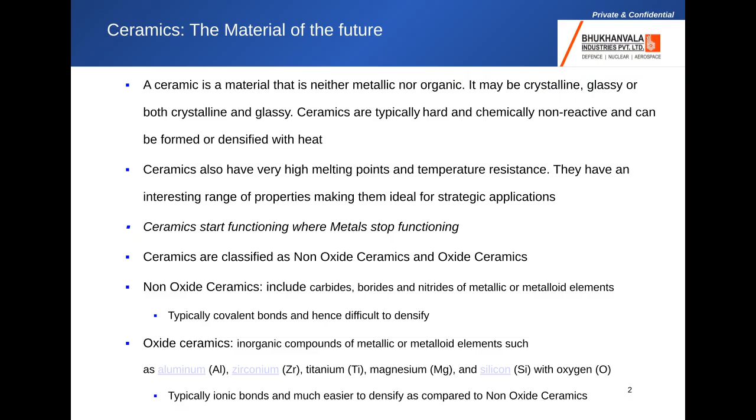I'm going to skip this. So non-oxide ceramics, that's been our main focus. We're now getting into oxides, but non-oxides are really what we've been involved with since our inception. These are carbides, borides, nitrides of boron, silicon, titanium, zirconium. They have very unique properties, very high hardness, excellent wear resistance, as well as oxidation resistance.

I'll be spending more time on boron carbide. That's our flagship product, which has very high hardness, low density, great nuclear properties in terms of neutron absorption. So it has applications both in defense and nuclear. There's boron nitride, which we are now working with ISRO and through a technology transfer are now actually making product that will be used in the Indian space program.

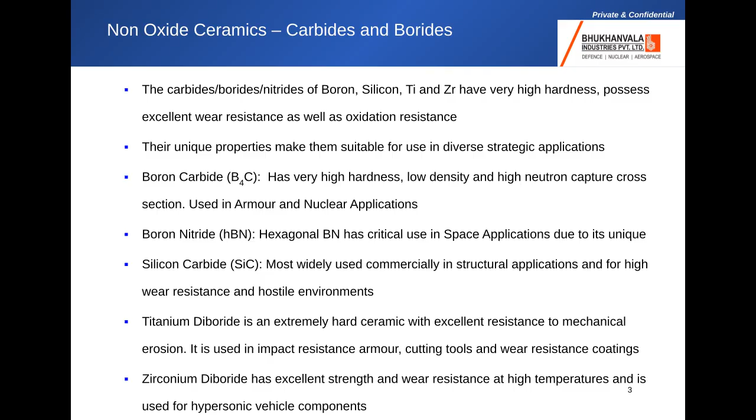Silicon carbide, again, very widely used commercially as well as in defense environments. Titanium diboride, again, excellent material for both wear resistance as well as nuclear application. This is something that we are now beginning to make under a technology license from BARC. And similarly, zirconium diboride is a material of interest for hypersonic vehicles, re-entry vehicles.

So just a small table of materials. I've tried to map out some of these ceramic materials and where we are seeing their applications. Of course, this is not exhaustive, there'll be probably more applications. So for boron carbide, on the defense side, you have boron carbide, silicon carbide, alumina, which are being used as armor material, both for body armor as well as for vehicle or aircraft armor. You have zirconium diboride, which is being used for ultra high temperature applications. So when you're looking at re-entry vehicles or hypersonic vehicles, there's work happening on that.

On the nuclear side, boron carbide is an excellent material for neutron shielding. And one of the things I'd like to point out is when we are talking of AI, ML, if you see the amount of energy that is required, the investment that you're seeing globally now on nuclear reactors, both fusion as well as small modular reactors, you cannot make a reactor without using boron carbide. So for us, the last few years of growth have come from the nuclear renaissance that we're seeing in the world.

And so everything that you talk about, whether it's the energy sector, it requires ceramics. Whether it's the defense sector, it requires ceramics. So this is more a pitch to all the people studying material science that you can remain in the core. You don't have to move towards AI ML. AI ML will require all disciplines of engineering to contribute.

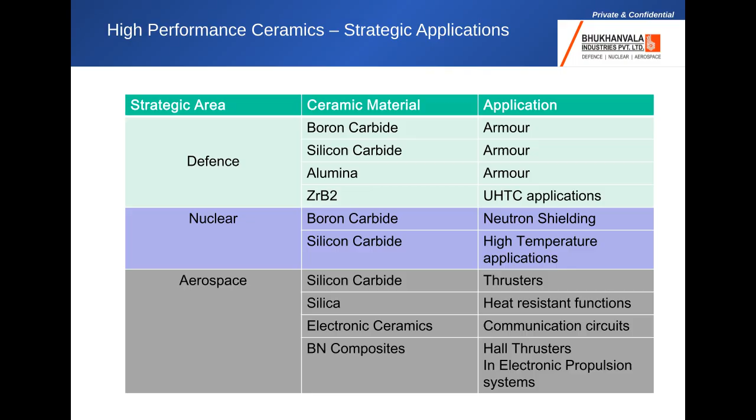And boron nitride composite. Boron nitride is a unique material where it's an electrical insulator but a thermal conductor, so it's used inside Hall effect electric propulsion systems. Your liners for the Hall effect thrusters are made out of this. This is now a flight qualified component that we have made with ISRO's help, and from this year it will replace American liners in the Indian space program. So this will be made in India for Indian satellite launches.

I think this has stopped. Can you... you can just go to the next slide, please. Just one slide back.

Like I mentioned, we are focused only on strategic applications. We do defense, nuclear, aerospace, and we are beginning to do some work on the semiconductor side as well. We're the only manufacturer of a complete range of boron carbide, from synthesis of powder itself, which we have a technology license from Bhabha Atomic Research Centre, to finished hot press components used for both nuclear and defense.

We've done a lot of strategic projects in India. On the fast breeder reactor being built at Kalpakkam, that's really the genesis of how the company started, to support that requirement. Under the technology denial regime, BARC had no alternative but to work and develop that indigenously. That's really what developed the capability at our end.

And we are also supplying into, I'll talk about this later, some body armor designs that have been made by DRDO as well as by BARC for the Indian security forces, based on our ceramics.

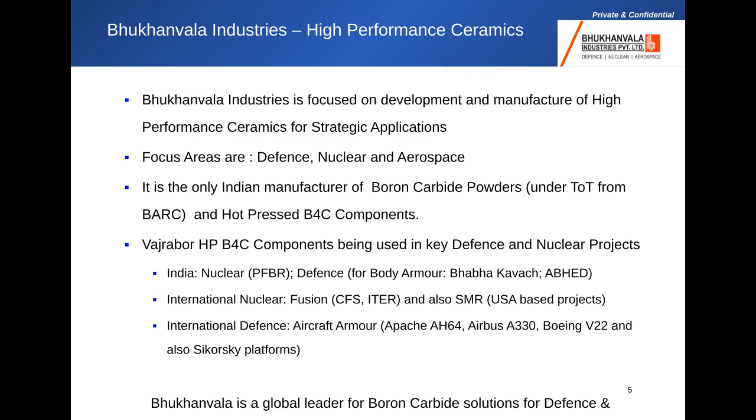CFS is a spin out of MIT. It's actually the world's largest funded stage Series B round, they raised $2 billion for Series B to build a prototype fusion reactor called the SPARC. We are supplying all the neutron shielding components into that. We've already supplied over $15 million to them, and there's another $10 million in the pipeline.

We work closely with ITER. This is where Prime Minister Modi had recently gone to France. We're working with different ITER units, and they will require huge amounts of shielding. So as a material, this is a great material to be in and to scale up.

We are also working with some of the small modular reactors. A number of speakers have talked about the requirements, and India has also announced a policy. Small modular reactors will require a huge amount of ceramics, both for shielding as well as for thermal management. On international defense, our focus has primarily been on aircraft armor.

Boron carbide is a very light material, and for aircraft platforms, weight is a premium. So anything that when they armor - some of our customers are making seats for helicopters, and the pilot and co-pilot seat are ballistically armored, so that when there is small arm fire, it protects the pilot and co-pilot. The ceramics are used in that context.

We're already on a number of platforms. We're on the Apache AH-64, we're on the Boeing V-22 Osprey, we'll be getting onto the CH-53K soon as well, and we're on a couple of AgustaWestland platforms as well.

So our idea is, we are a global leader in boron carbide solutions. We want to look at strategic expansion of our material portfolio, and my next slide will talk about that. We are a good model of taking a technology that came out of a government lab, really productionized it, scaled it up globally, and we want to replicate that with other technologies, other materials that we are licensing.

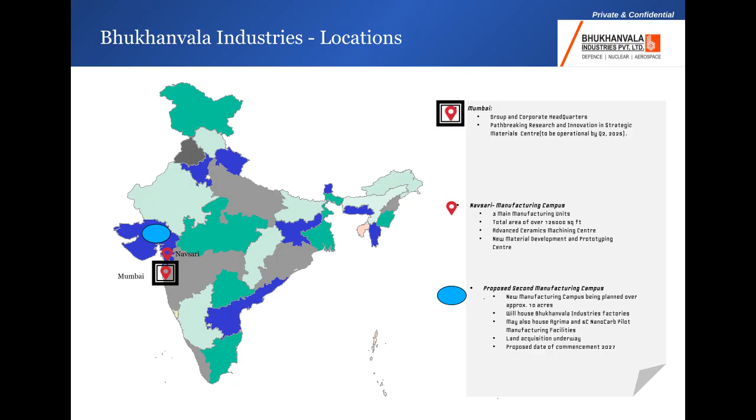Our engagement with IIT Bombay - we are calling our lab at Research Park 'Prism', for path-breaking research and innovation in strategic materials. It'll be focused on electronic ceramics for space and defense, and we'll also have a lab focused on advanced carbon technologies, where we're doing work on carbon nanotube sheets as well as carbon nanotube fibers. These are again technology licenses from BARC.

We recently signed an MTech fellowship program with IIT Bombay. A second year fellowship will be funded by us over the next many years, and students will be able to choose a project related to advanced materials with strategic applications. The first student has already been shortlisted by the institute, and we'll be doing work on substrates, alumina-based substrates for the space program.

Just a very quick introduction to boron carbide - strategic applications in defense and nuclear. Boron carbide is a unique material because it stops bullets and it stops neutrons as well, so it's one of those few materials used in both applications without any change in form. Its lightweight and high hardness make it ideal for body armor or any other armor applications with weight constraints, and it's expensive - a very, very expensive material. We have this constant engagement, or arguments, with the Indian users. The gentleman in uniform will appreciate that we always want the lightest, but we don't want to pay for it. I always tell them that we are the lightest, like to like, and we are the cheapest in the world. But there is a certain intrinsic cost to the product which cannot be brought down.

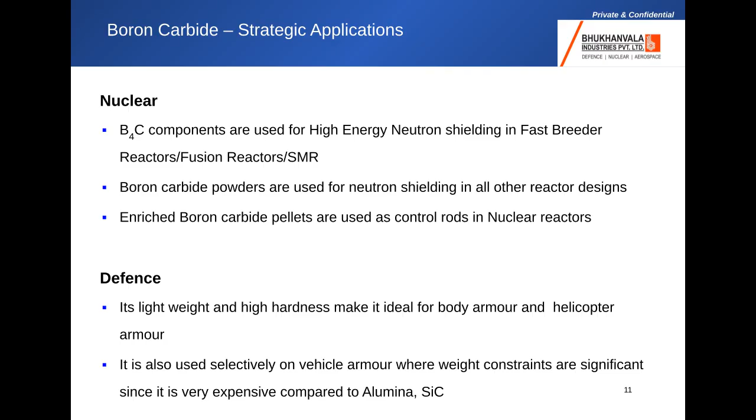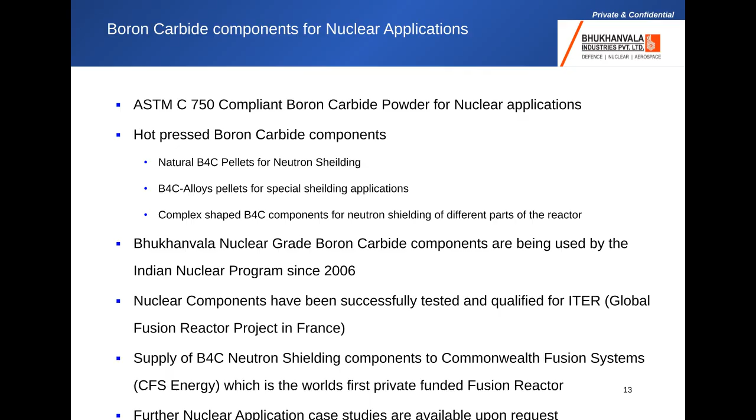Like I mentioned, we do the entire range of powders. For nuclear applications as well, we're supplying globally, and I think India needs to catch up on both the fusion and the SMR side. We are falling behind - the amount of startups we're seeing in France, in Europe, in the US for nuclear is fantastic, and I think we're being left behind on that. So I think you can't really have strategic autonomy unless your energy sources are secure.

I'm going to quickly run through some of the platforms like I talked about. We're on the Apache, on the Osprey. We'll be on the replacement for the Osprey, which is the FLRAA, the future vertical lift platform that the US is making.

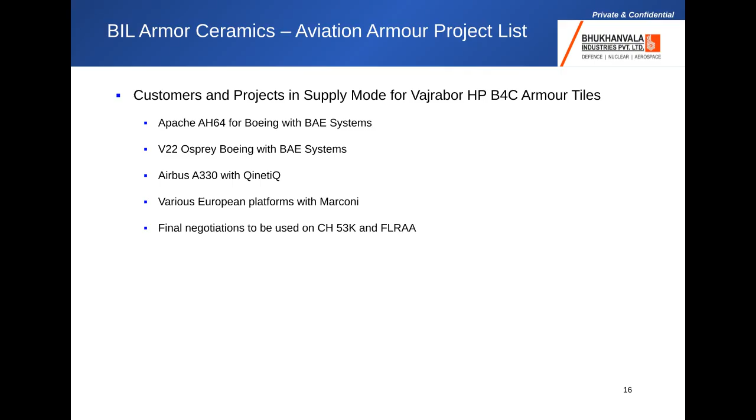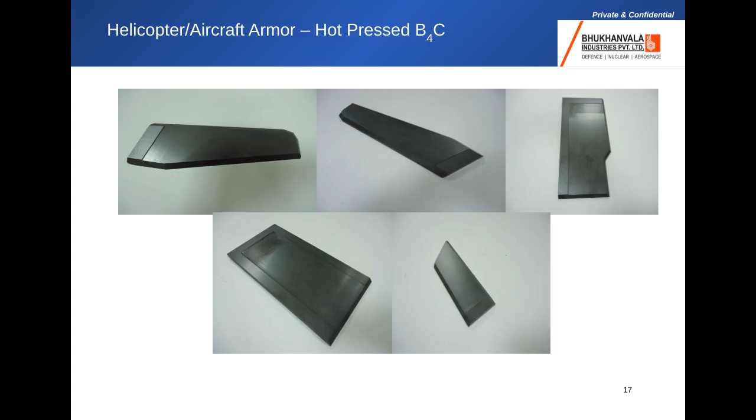These are some of the ceramic parts that we make, all built to print with complex features. Because they go onto the seats, they have to match with the metal frame of the seats. So this is something that we cut to size here and ship to the US, where it gets integrated into the final product. We are on the Apache - we've already supplied into over about 180 helicopters, and we have a new contract for another 336 sets with the US. We are on the Osprey, which is now kind of winding down, and we are on a future lift platform as well.

We will soon hopefully be on the ALH and the LCH as well. That's something we're working on with the Indian ecosystem to get our ceramics on the Indian helicopter platforms.

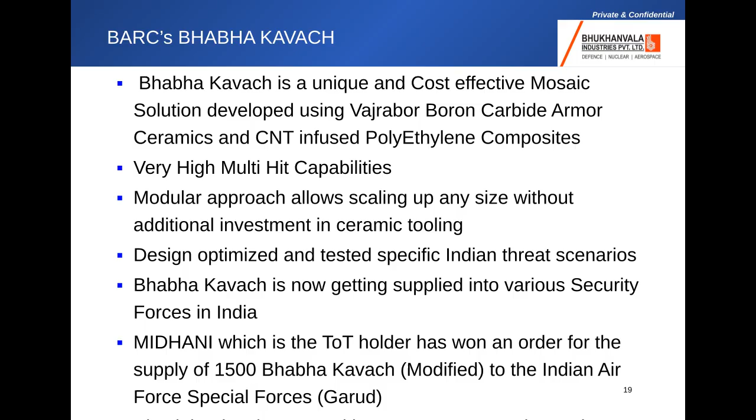There are two initiatives in India to make lightweight body armor. One was through BARC, called Bhabha Kavach, which used our ceramic and carbon nanotubes in the polymer to develop a very good solution. MIDHANI, a DPSU, is a TOT holder and has been supplying some amount into the armed forces, though it hasn't really scaled up due to price concerns. I believe there is now an engagement with the Air Force and DRDO to get that done, and it's a great solution, very well designed.

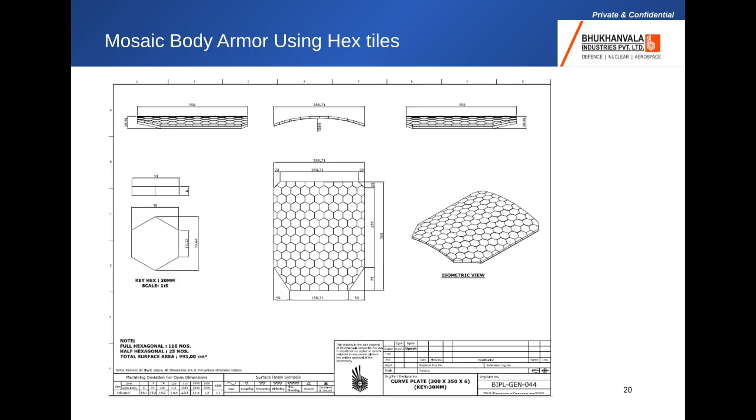Similarly, there is a recent technology announced by DRDO and IIT Delhi called ABHEDH. An MOU was signed recently by the Raksha Mantri for 3 technology holders to take it up. This is again based on our boron carbide ceramic.

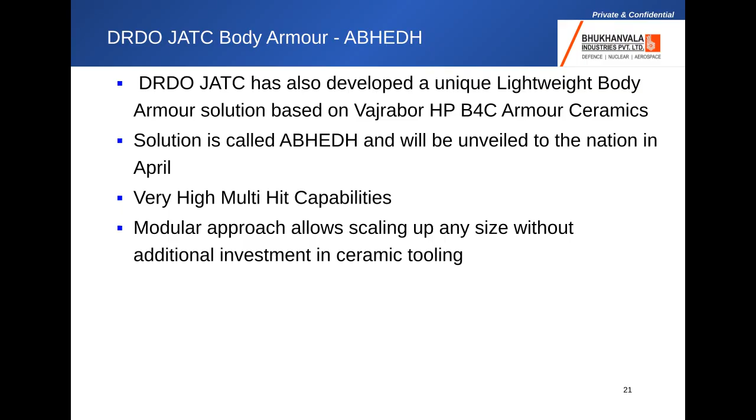I'll talk a bit about, at a policy level, how to take these solutions into the armed forces. This is a very good solution, designed for API rounds, BI6, and very extensively tested by IIT and DRDO. Hopefully this will translate into usage by the forces.

With this constant cost pressure, we are now introducing direct sintered silicon carbide, which should be substantially cheaper. It'll be maybe slightly heavier than boron carbide, but substantially cheaper, and if you take the mobility and weight requirements of special forces out of the equation, this should actually work for the majority of the forces.

The US Army also uses this material as the material of choice for its bulk infantry, keeping the very lightweight solutions only for the Green Berets or the Marines. I think that's the right way for the Indian Army to look at it too - to have a differentiated QR for weight, so you're not forcing the special forces to use the lowest common denominator on price.

As I mentioned with ISRO, the electric propulsion systems will soon use liners, and we are very excited about the whole private space industry, so that once it goes on ISRO flights, we can cater to all the startups here as well.

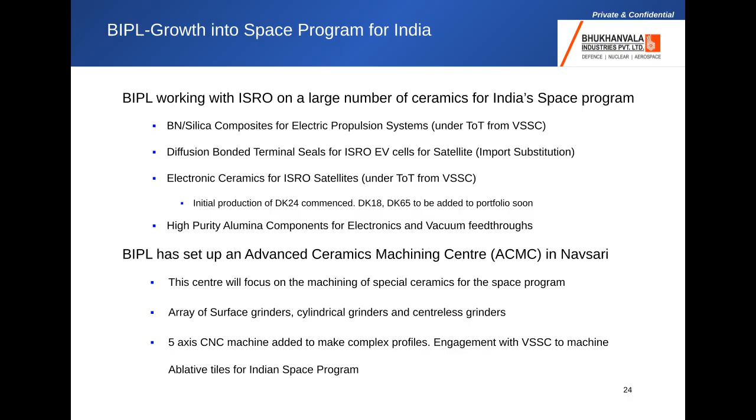So these are some of the parts, like I said, aircraft armor. These are the thrusters that I talked about. Some high purity alumina cones that we're making again for the nuclear program. Where you have a high plasma environment, you have the ceramic facing the plasma side, and then you have the metal on the other side. We're doing some sputtering targets.

Again, this is something that we have now stepped into as our segue into the semiconductor industry. We're beginning to export sputtering targets to the US and Europe. Our idea is to develop more sputtering targets with IIT Bombay's help, looking at different materials. IIT Bombay itself imports a lot of sputtering targets, so our plan is to first start working with your needs, develop high purity sputtering targets in India, and then benchmark its performance with imports, and then start exporting.

Electronic ceramics is what I talked about. So BMT is one particular material composition. We now have 5 different compositions from ISRO, all operating at different frequency ranges, including what will be used for the NAVIC chip as well. So we've got that technology transferred as well.

And this was the terminal seal I talked about. So the white thing that you see is alumina, this is aluminum, and you're able to join those two without any braze layer. It's a unique technology developed by ISRO. We are hoping that we can use this technology to join two dissimilar metals, or different combinations of ceramics and metals. It has a lot of applications. Right now the system is a very small one, so we can do very small components, but the technology itself has great potential.

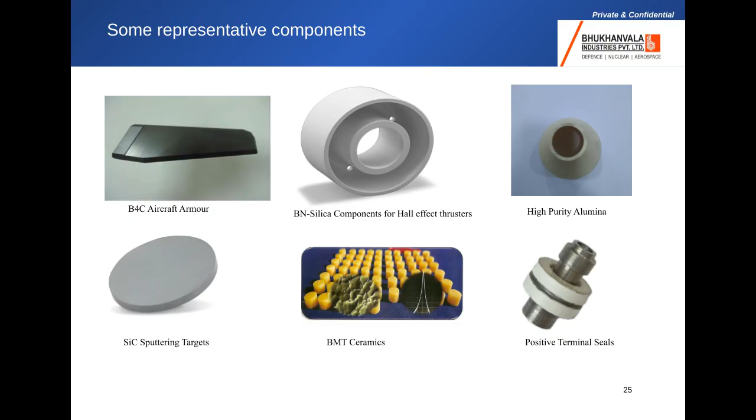So I would just take a few minutes to talk about what I think is important policy-wise to look at for strategic materials. I think what we really need as a country is a national strategic materials policy. What are the materials that are critical for us as a country? When you look at defense, nuclear, aerospace, as you know China has a monopoly on all rare earth metals, and this whole Ukraine war is eventually going to end up with the US and Russia getting access to that — that probably could be the underlying reason for it, right? However, as a country, we don't seem to have any long-term vision on what's going to be needed to secure these materials for us.

Today, when we make boron carbide powder, we are still dependent on boric acid, which is imported, because there has not been any real exploration done on whether boric acid deposits exist in India. So right now, most of the material is coming from Turkey. They have one of the largest mines. You also have mines in Latin America. Now, if such a critical material is imported from Turkey, where you're not really sure whether it's friend or foe, I think we need to think further ahead in terms of how we would secure the supply chain if things go wrong.

So I think when Parrikar sir was there, he started this National Strategic Materials Policy, and then post his demise, it has just kind of withered away. It may be important to get focus back on that — on what is critical. Let the users define what materials are critical and build capabilities. And as AVM Kode said, it's not just capabilities, you have to invest in capacities also. One is to make something, and then to make something at scale, and that requires the government to fund capacity building within the country.

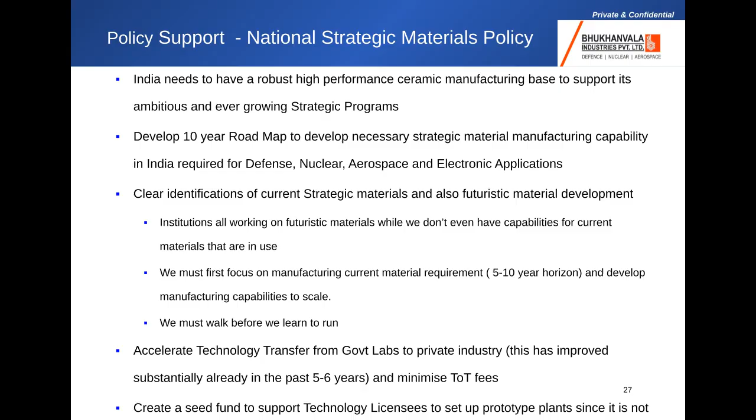And lastly, multiple speakers have talked about this: create a seed fund for technology which has longer gestation periods. The time frame of traditional venture capital and private equity funds may not really work for strategic applications because the time cycles are too long. So there has to be a different way to fund these deep tech startups through a different kind of money which is patient, which looks at national importance as a metric and not just returns.

So that's just a wish list. Since I have the forum, I might as well put the wish list out there.

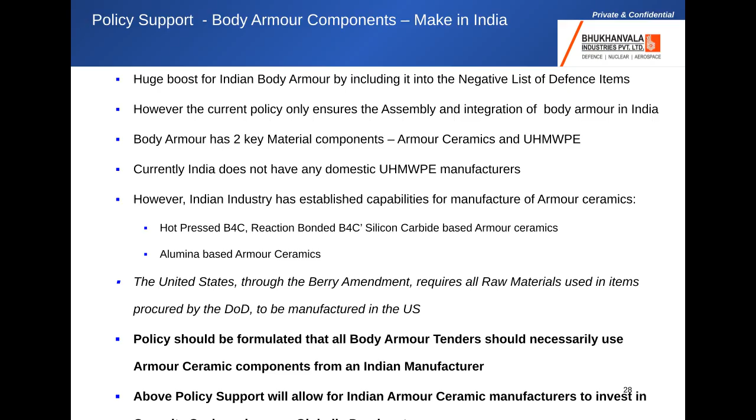So today, I cannot sell my ceramic to a US body armor program because it is not allowed by law. That's why only the aircraft armor is open to us. It says that for all body armor, the ceramic must be made in the US. As a result, we are actually looking at setting up a facility there so we can play into that market.

So our suggestion is that there is enough ceramic capability within the country - there are multiple players, including us. I'm not saying I'm the only one there; there are other players doing different kinds of ceramics. If you say that the ceramics must be made in India for whatever the army and the MHA buy, then that capacity building will happen automatically.

It is not possible to build ceramic capability going on a tender-to-tender basis. We need to have the ability to have some forecast. It's very capex intensive, so we need 10-year visibility saying, okay, this is the amount of components that will be used, and we can invest in those capabilities. The US has actually been doing this for decades now, so it's not that we would be the first country to do it.

So I think we need to go that one step further, not just look at indigenous content percentage, but also say that critical items that will be used will actually be made in India. There was a recent news article about a drone contract that got cancelled because a lot of the components were Chinese. Ideally, we should build that into the tender conditions so you don't have contract cancellations later.

So again, this is my wish list, and I've been saying this at various forums, whether it's NITI Aayog or not, so hopefully it'll get translated someday. But that would give us that confidence to invest in capacities to cater to the Indian needs.